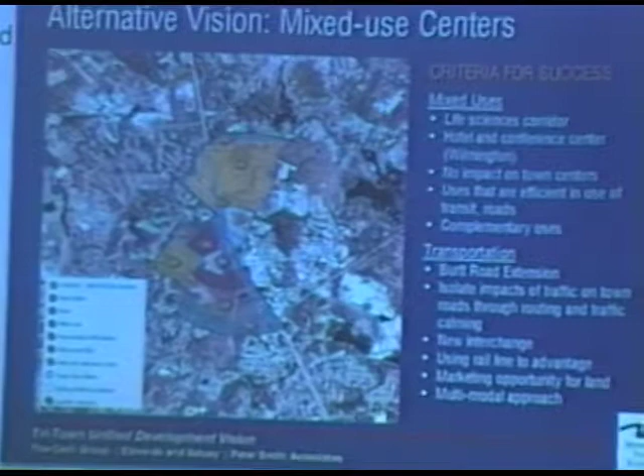What I'd like to do now is turn it over to Jeffrey Morrison-Logan, our project manager, to continue the presentation on the process, where we've been, and how we arrived at the vision plan. Thank you. Great. Thanks, Ken.

Can you still hear me okay if I'm up here? I'm a little taller than Ken, so my proximity to the mic's a little different.

Echoing Ken, there's been a lot of work done to date, going back to 2007, and arguably beyond that when the first interchange was contemplated. This has been the basis for the workshops and charrettes we've done in the fall and back in January, leading to the form-based code you're going to see tonight. We've come a long way, and you'll see details that build on this prior work.

This is the mixed-use centers plan done in 2007 that for the first time identified the different nodes and land uses contemplated in that same study area.

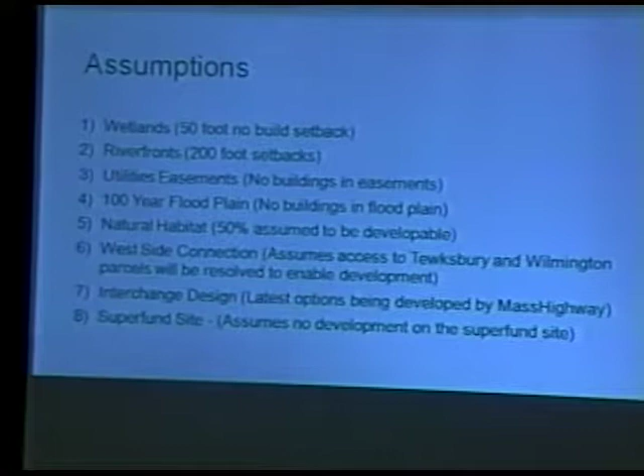Ken mentioned there's a lot of assumption involved, and it's important to understand that as you look at the graphics, there are moving assumptions reflected in our work. Highlights include wetlands, setbacks from wetlands and riverfronts, easements, floodplains, and natural habitat, all affecting where development can and cannot go. We had to make assumptions about how and what percentage of development can happen, which was very informative to developing the form-based code.

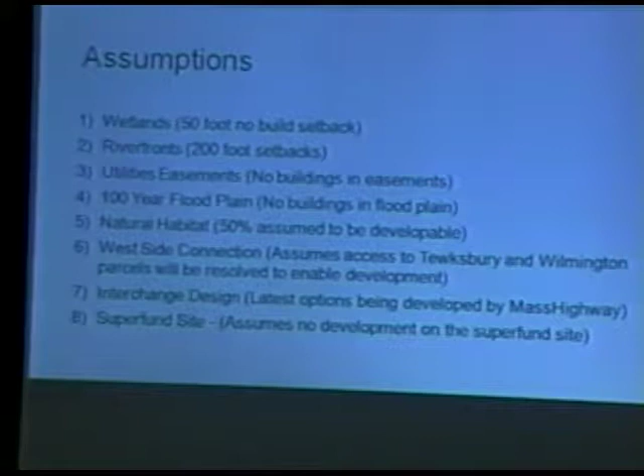The interchange itself, where the highway interchange is, and the options Mass Highway and their consultants are pursuing are important factors in where we can connect development into the system. The West Side access idea has seen a lot of discussion over the months and continues to evolve, so we made assumptions about it getting resolved as plans move forward over the next few months. Lastly, there's the Superfund site.

You'll see in some of our plans that development is shown there, but we wanted to go back and remind people that the intent is not to have development on the Superfund site. We wanted to clarify that up front.

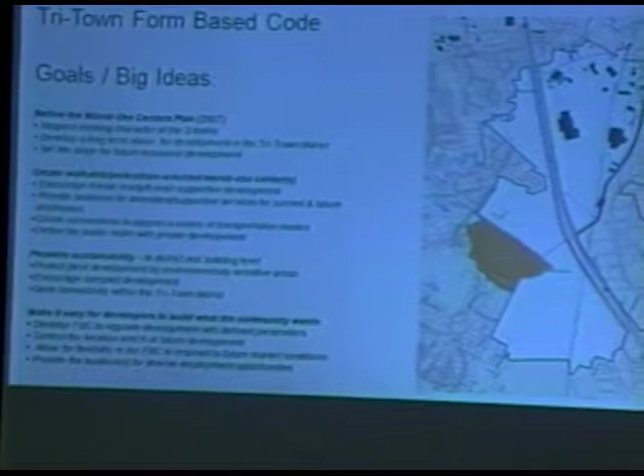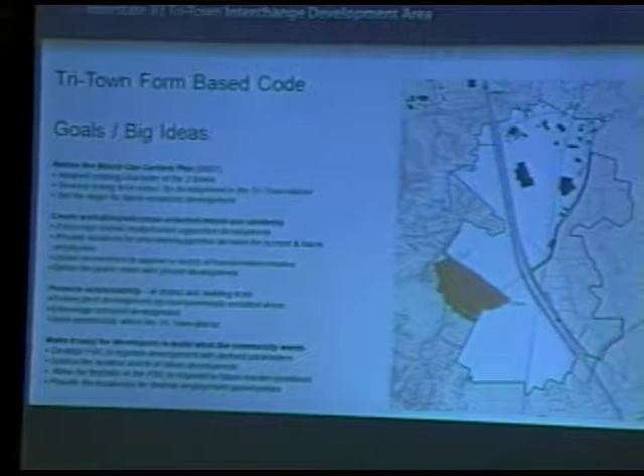We spent a lot of time at the first and second charrette talking about goals and objectives, which we've documented. You'll see many of them on the left-hand side of this slide. Jeff will talk about those as we go through the different areas within the 700 to 800 developable acres. These are important goals that have lived on in the form-based code draft in front of you tonight.

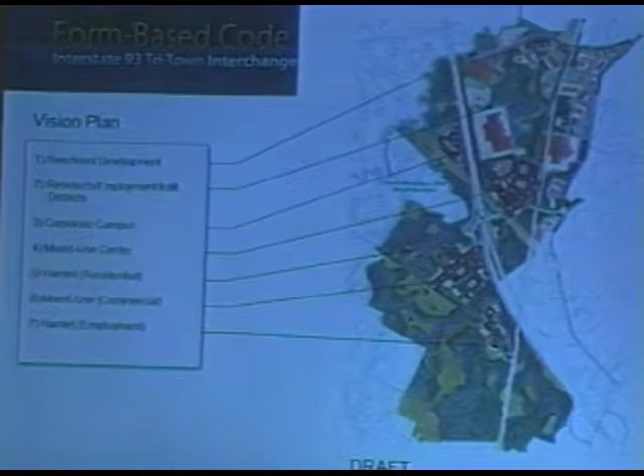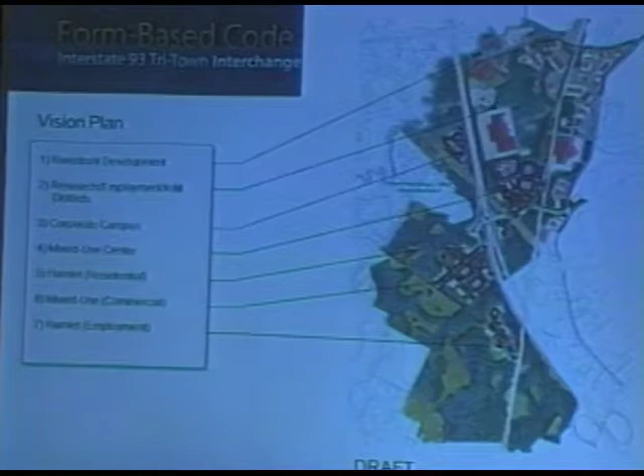The charrette in January focused on taking those goals and developing the vision plan for those same 700 acres of land. Where the red development shows up on the plan, we identified character districts, zones for areas where development shares similarities or differences. Those became important for developing the code, so that from a regulatory, zoning, or form-based code perspective, we could think about those land areas in terms of different character districts.

Jeff will talk about the differences between those. That's really the framework for what we've done to date that's led to the draft you see before you today. These are important steps from the last 10 months of our process, going back a couple of years.

We met with the task force last Thursday, and they felt it was important to share updates from that meeting. One, there was interest from the task force, mostly from the Tewksbury side, about looking more carefully at the character districts in the draft code, potentially changing one from mixed-use commercial to an employment park. That conversation happened last Thursday.

The character district currently shown on the landfill site, the Superfund site, was always intended to be removed. So we're going to remove that in the next draft as well.

The comment period we're about to embark upon tonight—in our initial project schedule we had a shorter time frame, but we're going to expand that to give the public more time to look at this draft. We're now targeting a 6-week comment period, and we'll explain that later tonight. Overall, the project schedule will get lengthened.

This is a very monumental event, and with that comes the need for time to digest these things and move forward. The task force really embraced extending this process—not to prolong it, but to give it time to sink in and get the feedback we're looking for.

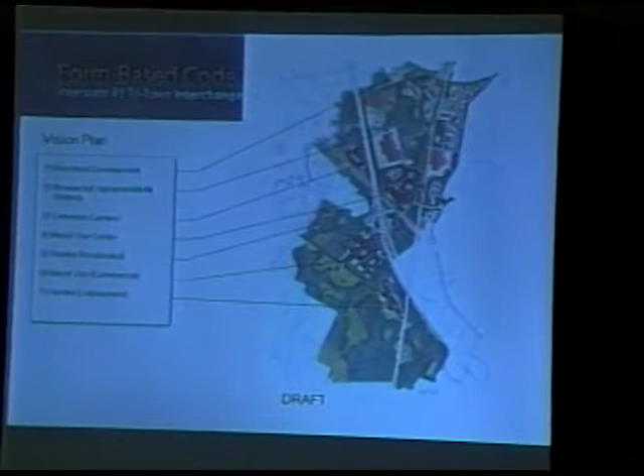These are quite simply similar to zoning maps, but these are plans that have regulations attached to them. There are two different kinds. The first is a framework plan—the overall plan, based on the vision plan. Like any good form-based regulations, they have to be based on a vision. So here's your vision plan, here's the framework plan.

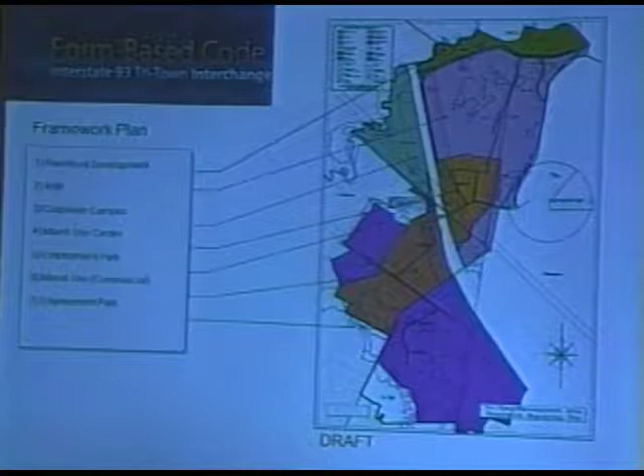See the two—the framework plan is really what it says. It sets the overall framework. It sets the boundaries for these different character districts, within which there are special rules that will push towards their character.

The second kind of regulating plan is a specific regulating plan. This is a plan made for realizing or building one of those character districts. Within each character district, before you can build, you need a regulating plan or plans.

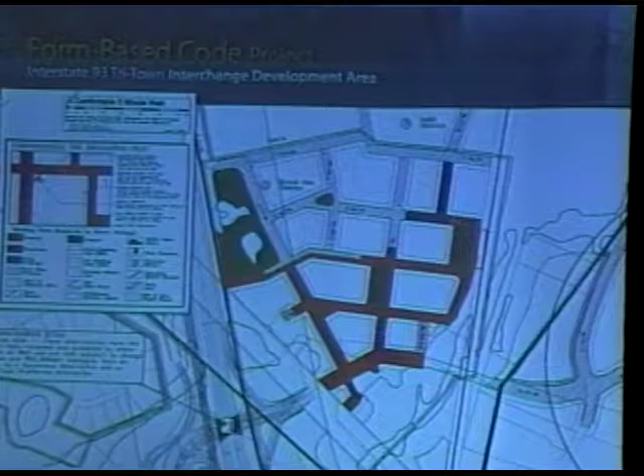And I think you can still hear me whether I'm on or not. This is an example of two regulating plans we've put in the code as examples, on both sides of the freeway, focusing in on the west side. The regulating plan is a very precise document. This is an example—so if someone were coming up with a new regulating plan on a different property, they could follow the example shown here in your documents.

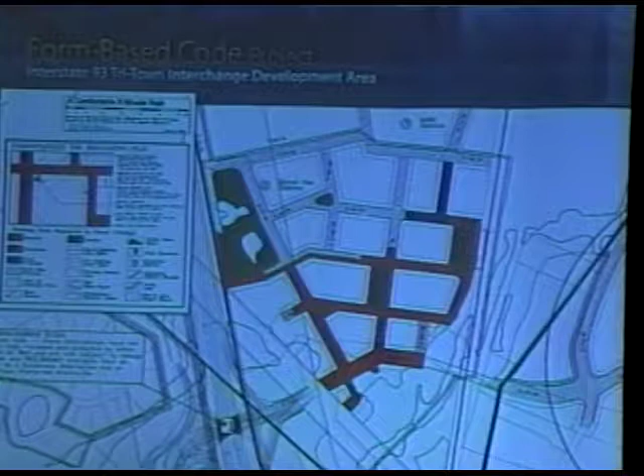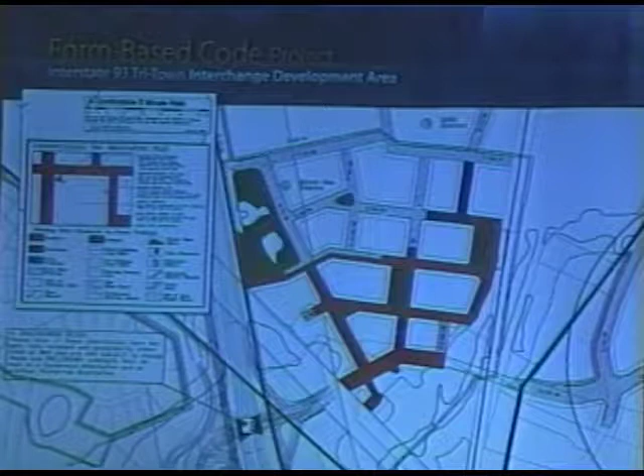Regulating plan has a key. It has extra information. You'll notice there's a specific note there about the interchange and what's shown here. A regulating plan is a place where you can have very specific, very precisely site-specific information and rules applied. It's also a place where the code references other things. You see the colors that are in the public space in the streets. Those reference the rules for the buildings that may be built on the private property in the third dimension, form

and function. Also, another minor point, you see there are two lines. There's an outer red line at the edge of the block. That's required building line. That means basically start your building here, put the front of your building here. The blue and white line that's set back inside that is a parking setback. So however parking is done, it can be done within that block. That's up to the private sector to figure out exactly how to do it. But the public's rules say don't give us a parking lot out on the edge of the street. It has to be pushed back and hidden.

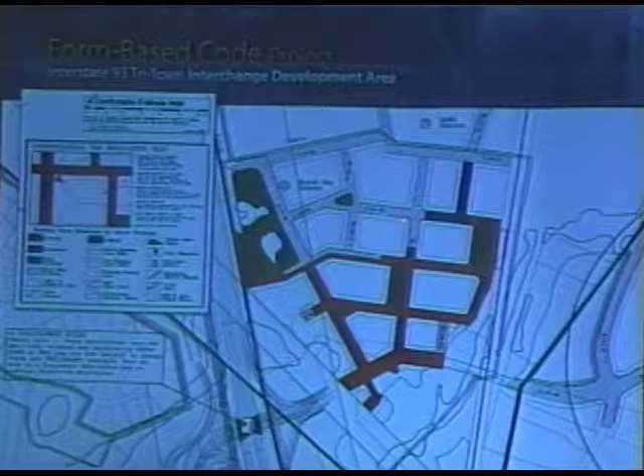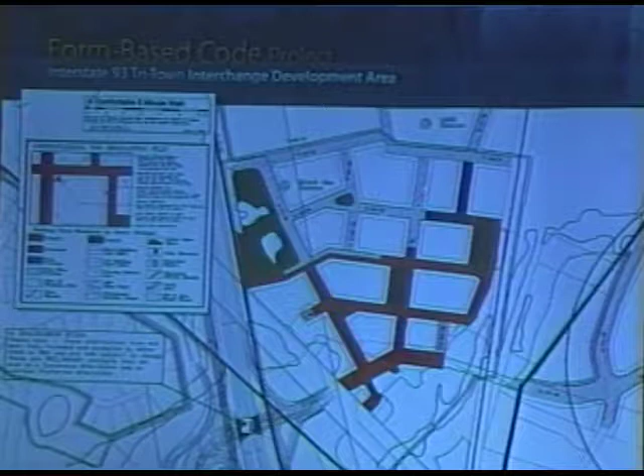Here's that parking setback line, if I can get my hand not to wiggle, and here's the required building line. So these colors and stripes define the public space that you were to see if you were to drive down the street, walk, or bicycle. And the rules are based on making that public space. Those colors lead you to the building form standards. As I said, these are the rules for the form of the building. It's form and function, but form first. Functions or uses second. There are a few different flavors of these.

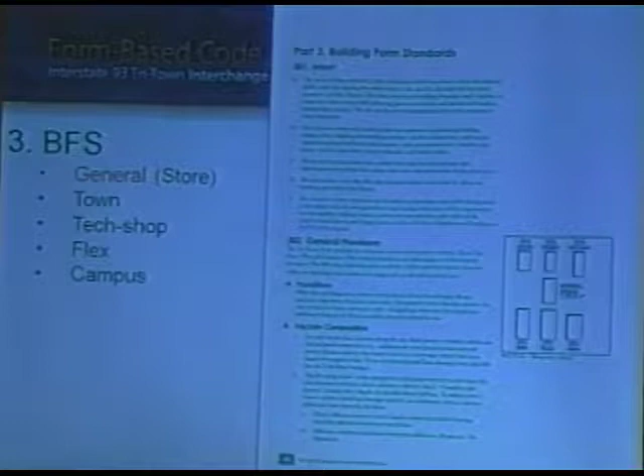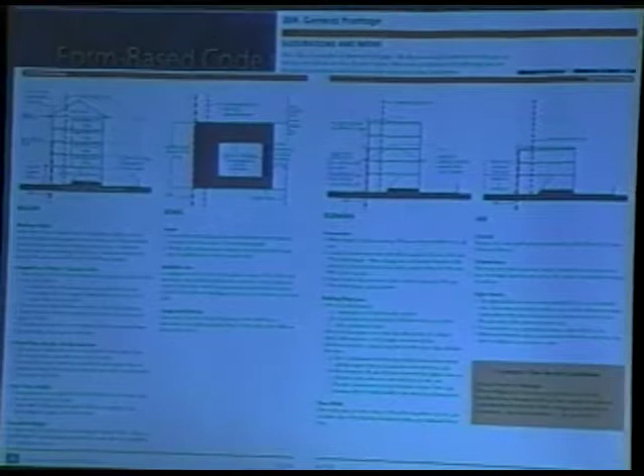The first is the general, which is we think of it as the most common type, intended to produce buildings like this, just normal town or city buildings. The rules are arranged. It's a pairing of graphics and what should be simple, clear language. There's some things that a diagram can tell you more precisely and obviously more quickly than words can. There are also some other things that words do better than diagrams. So it's a pairing of those two. You'll see this, we'll talk about this a little bit more later.

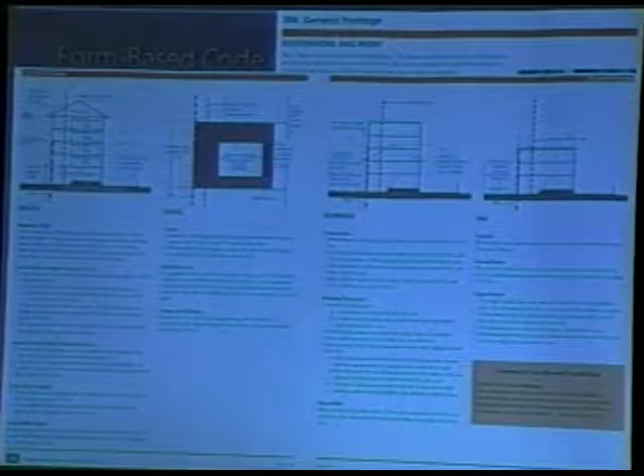There's a variety, a flavor of general we call storefront, and it is, I would say, as simple as it sounds. It's the same building, but on the ground floor it has a storefront. Think about, and certainly have seen a bit of it here in Wilmington and Andover, Tewksbury, the Great American Main Street. It's quite a normal thing. Buildings with shops on the ground floor.

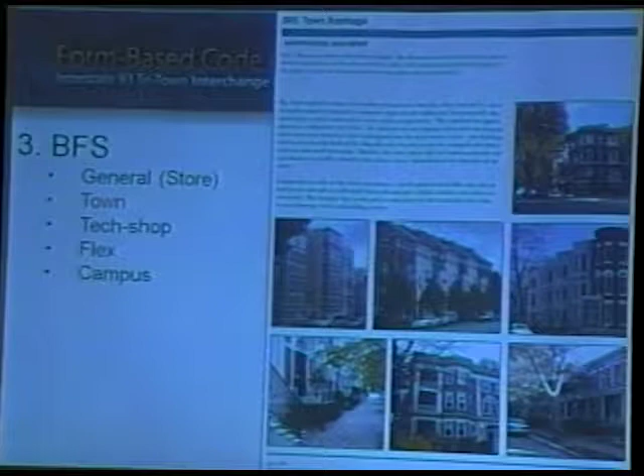The next type, town buildings. Fundamentally, what we're talking about here are those buildings very similar to the general, but everything's coming down a little bit in scale. Smaller buildings, less height. It's a reduced form of that. Think small apartment buildings, townhouses. Again, the set of rules, where before general was showing, on that example, minimum 3 stories, maximum 5. The town is showing minimum 2, maximum 3. So also lot widths tend to come down, etc.

The tech shop, a play on the workshop, but with a technical 21st century bent perhaps. Some examples of the kind of architecture it could produce. This is a type that's really about jobs, very flexible on its uses. Can be 1 story. It has to be a 20-foot high story, so it has some presence on the street that also fits with what tends to happen in workshop or technical shop applications.

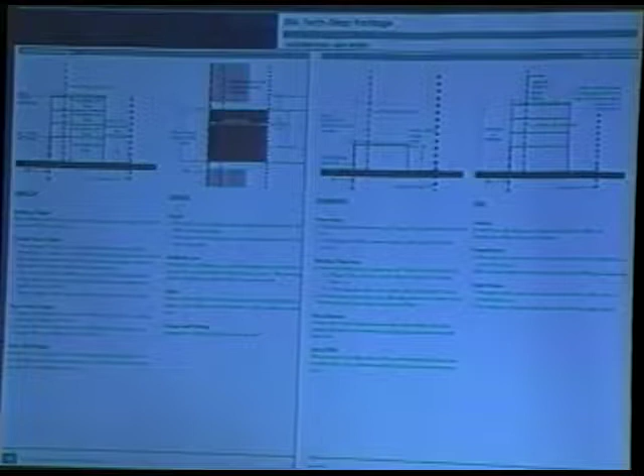But an interesting thing here, we're also allowing this to go up to 4 stories. And you've got examples here on the site already of technical buildings that are more than just the 1-story shed. They're starting to go up vertically. This is a 1 to 4 story, but I think you've all been made aware of within 500 feet of the freeway, there's a bonus of an additional 2 stories. So in some cases, these buildings benefit from that.

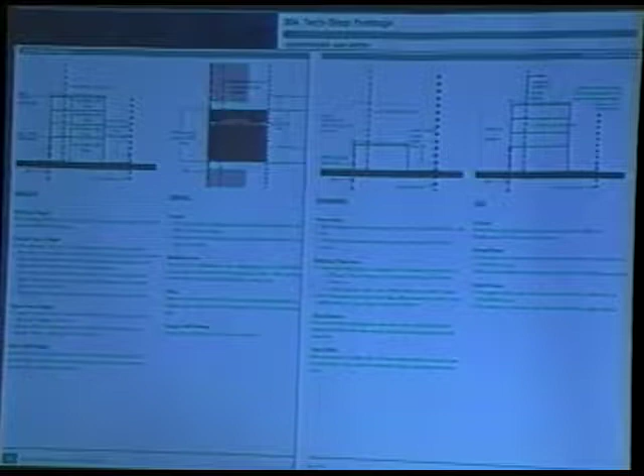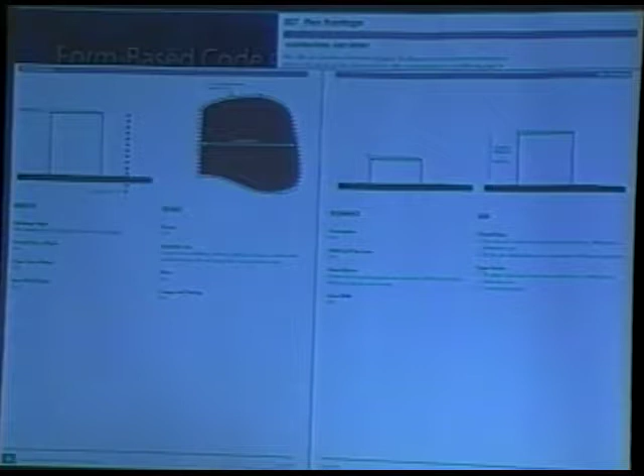The flex building type, it's almost a stretch to call it a building form standard. It's the loosest. These are used in the employment districts. The rules for this are absolutely simple. The employment district sites tend to be out away, not up against the neighbors, behind trees, at a distance. So the public sector rules on them are kept to a minimum. There's a height cap and a perimeter cap. We also require them to plant more trees on the perimeter.

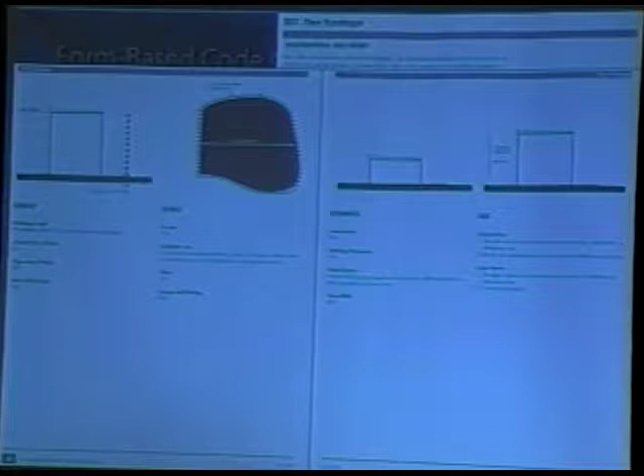But basically, this building type allows whoever's developing that a huge amount of freedom to do within that large envelope what they need to do for their business. And these are things that are out and not in areas where, on the site plan, they will be seen unless you go out to them or are in a helicopter taking a flight. And finally, the campus type.

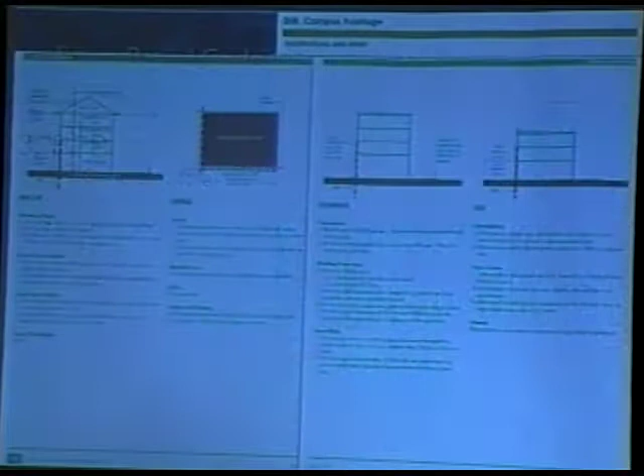The hope is to get some architecture that might look like this, but there's still a lot of variety. This is really a variation in intent on the tech shop. It's about jobs. It's really allowing employment, technology, commerce. And in that character district, and I'm sorry, I can't help but get ahead of myself a little bit, where campus is employed, there's some special rules that will push buildings towards being grouped around courtyards, green courtyards, quads, like a campus we think of.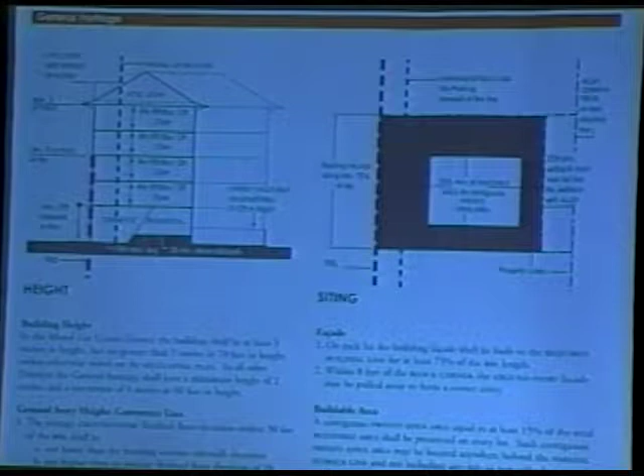Second, siting. I think the major thing that you shall do on siting is that required building line. And again, that simply means start your building here. There's great latitude in how deep the building is and what goes on behind that. But a lot of the conventional things like minimum lot, open area, et cetera, are in here in a different form.

Two others: elements, at their most simple, windows and doors. And I'd add parenthetically, most of the rules of the form standards about the buildings are focused on the facade of the building. So on the back of the building there's much less control, the idea being it's out of public view. That's more a matter for that private property owner. So there's more control on the front facade that the public sees and less on the back.

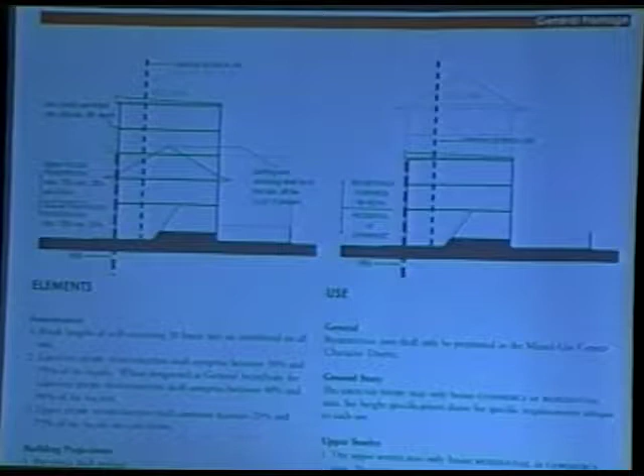And finally, use, and you see in this example, it's quite a broad number of uses allowed on the ground floor. In this case, residential or commercial. Above the ground floor, residential or commercial. One specific thing, no retail above the ground floor. There are actually some very specific circumstances where you can do that, but the rule is retail, if you're going to have it, needs to be on the ground.

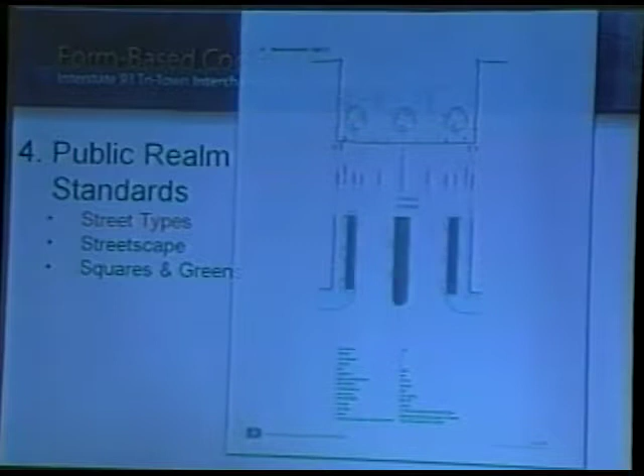The code also, Chapter 4, has public realm standards. Now, in a form-based code, the public realm is more designed and more controlled than normal, because that's what the public gets. The first element of that are the street types. Where streets are put in, there's some very specific prescriptions for how those are. Wide sidewalks in most cases, street trees planted in such a way that they actually have a chance to grow. Building frontage is controlled, and much like the graphic you see up here on the upper right, that public space between the building facades is really well considered. The private sector is the blank area outside of that. That's sort of their side of the partnership.

In addition to that, there's standards for the streetscape, how often you plant the trees, things 30 foot on center, 40 foot on center, the collection of species that you're allowed to use on the public street or in the private yards. And the standards for squares and greens are really basic standards to make sure that these are public, in public view, open spaces that are usable, not overly designed, fancy, kind of hiding places behind berms, but public spaces with green or brick, trees planted, and open to public view all the way through.

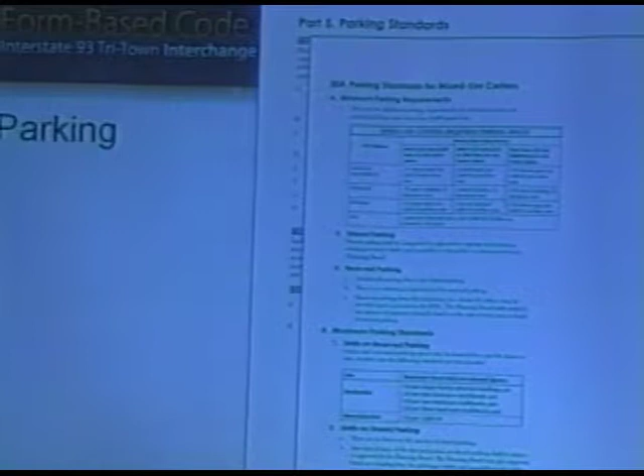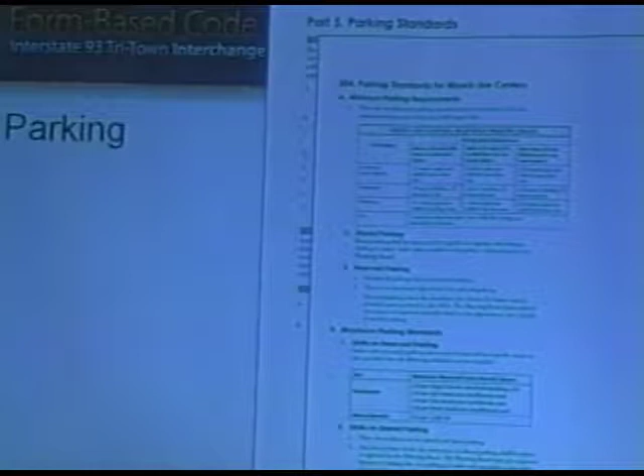Parking standards, beginning on Chapter 5, page 57. I'm not going to get so much into the numbers here, but the basic idea is this parking is done in a targeted way. We're looking at different areas where there's a wildly different circumstance. Generally, the parking standards that we've been using across the United States for about the last 50 years are very strange things. They're supposedly very scientific, and we treat them as if they're fact, but they're not. They're designed for a world which rarely exists, and generally inappropriate, and this is a correction for that.

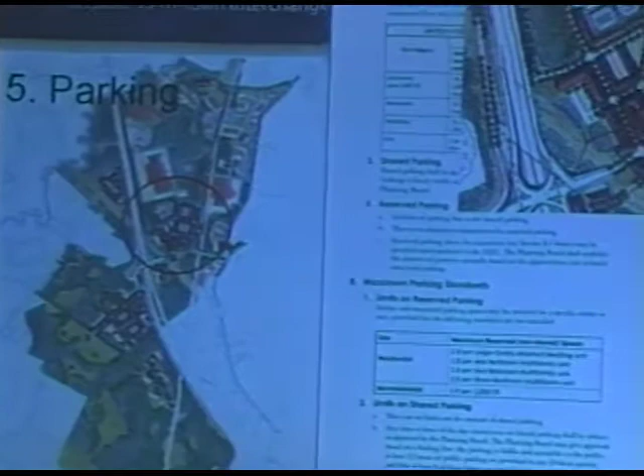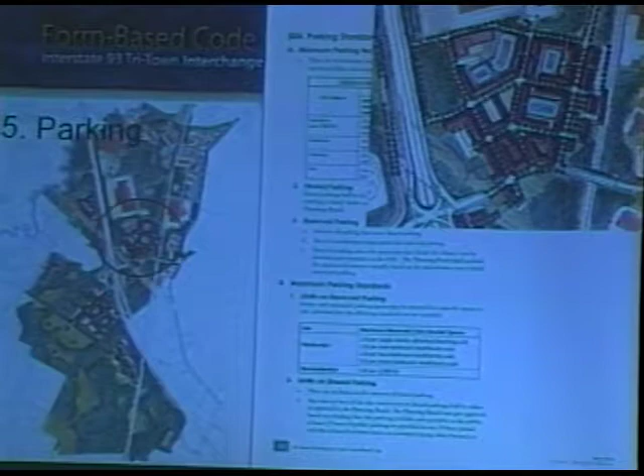As an example, looking at the vision plan, the mixed-use district on the east side of the freeway. The amount of parking you're going to need there is informed by several things. There are multiple connections to the outside world, different ways people can go. It is mixed use, so you get chances for ride sharing and efficiencies. It is to be a park once environment. So if you're there because you want to go to a restaurant or buy something, or you live there, that doesn't add up to 3 parking places. You can park once and walk a few hundred feet in any direction and be confronted with all those choices that a good downtown gives you, a good town center.

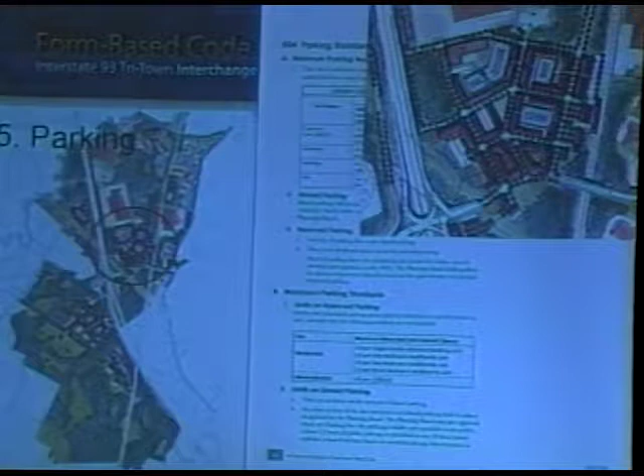So there are parking standards and reductions that are set for that kind of environment, and they're quite a bit different than the ones that are set, for example, for the employment pod down on the south. That really has one connection, one way in and out. And it is going to be, in gross terms, surely a single use. I mean, there may be multiple businesses down there, but it's going to be pretty much all one type of business. You're not going to get a great deal of shared parking based on that.

I will point out that in the code, in all of these instances, everyone is encouraged to get involved with your existing TMO. I'm going to use the wrong term there, but plug into existing things where some parking reductions are available if you have a shuttle system, ride sharing, et cetera. So we're not ignoring those things, but we're acknowledging that it's a different parking situation. If you're driving down to that employment center on the south, your car needs a parking place.

If you're talking about an activity in the mixed use area, one parking place can serve several places. So the reality and the science of the amount of parking that's needed is a reduction. That comes down so you use the land more efficiently. There's that one way in and out.

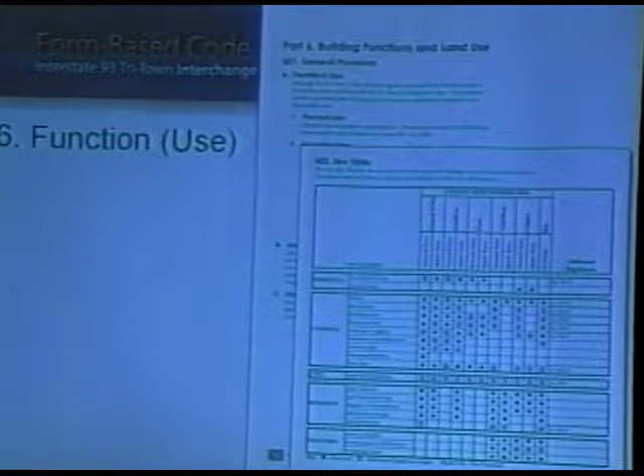I'm sorry, I go again to a retail use. If somebody has a bookstore and they want to change to a shoe store, that should be their own business and not something that requires a lot of paperwork. And the code can take it in some instances quite a bit further than that. And again, in all the building form standards, you'll see that last section, use, spells out what those broad categories are.

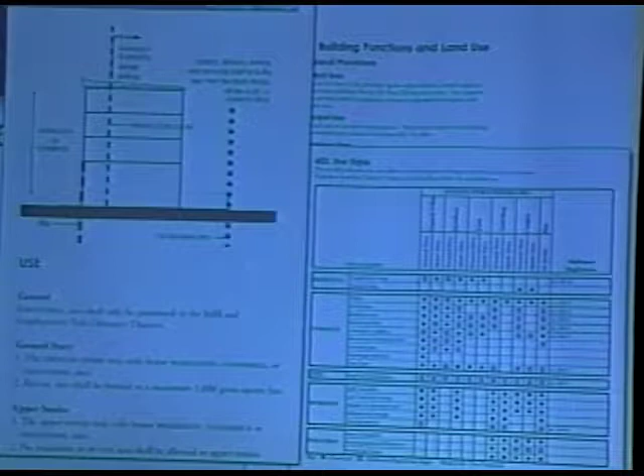The form standard itself doesn't get into some of the specificity, where in the table you see there's some uses that can be special exceptions, so there's a little bit of extra control if there's anything iffy about it. But in general, a form-based code is much more forgiving on uses, much more precise on forms. So the business sector has an easier time of it. They can do multiple things within the given form.

Definitions, simply put: the thing we're pursuing, certainly in the mixed-use center, is a different world than conventional zoning. So there are some terms that are going to be specific to making a town that aren't used in conventional zoning. There's a definition section. Whenever you see a word in the code that is in small caps, that means the code means that in a very precise way that you'll find in the definition section. We try and use that technique, by the way, as little as possible, if it seems like there's a small cap every 3 lines.

Okay. Matt. Great. So thanks very much. I'm Matt Waller. I'm with Robinson & Cole, and we are, as Carol described, legal consultants for the project. I'm just going to touch briefly on the application process and the review process that your planning boards are going to be involved in. And we really tried here to tap into the existing approval processes that you have under current zoning and not try to reinvent any wheels, but really try to stay within what you're already doing as much as we can.

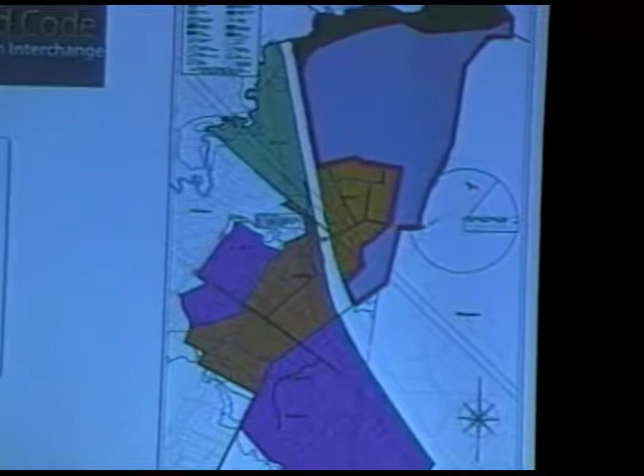I'm going to talk more about the character districts themselves in the framework plan and what they're after. Again, based on the vision plan, I can't say that too much, but it's kind of a reification of the vision. 7 districts. The riverfront up at the top, infill, campus, mixed-use center, the 2 employment centers, and the commerce, or the mixed-use commerce center.

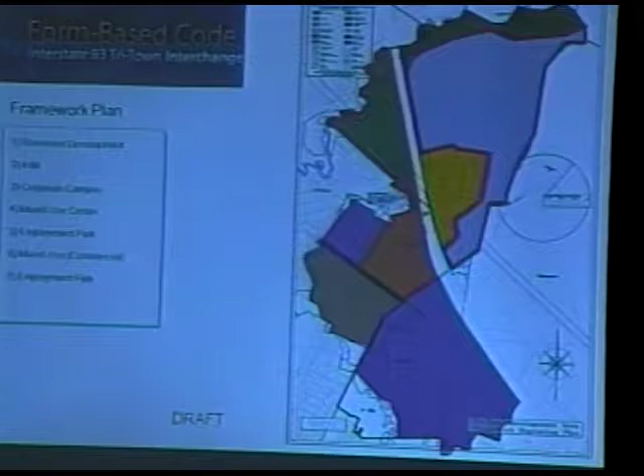Now, something that's added since the June 3rd talk is that the Superfund site is going to be taken off the table. They won't be included in character districts. They're beyond question not included. And the framework plan is a little bit like a zoning map, and it covers everything. The reality of what's developable is another thing entirely.

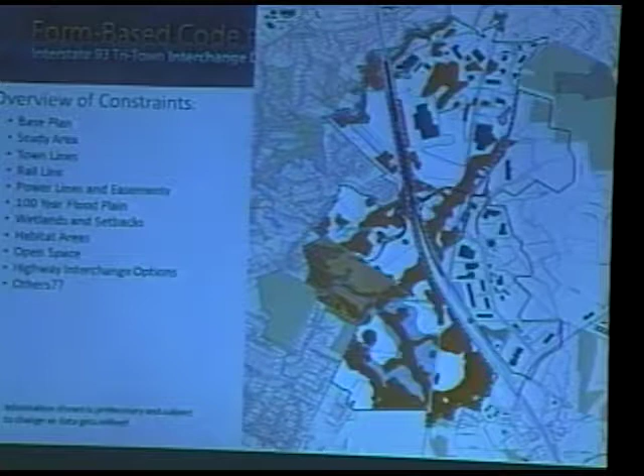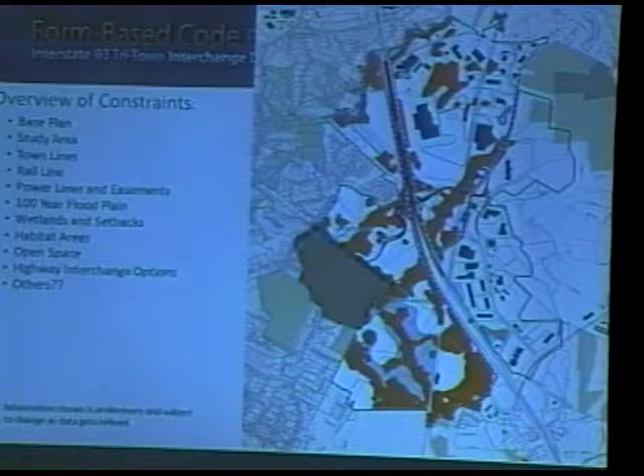On this plan, which is a preliminary look at what might be developable and what the constraints are, it is only the completely white areas that are developable. And of course, some of those are completely isolated, so there are other questions. There are some areas that look to be kind of a light pale blue. Those areas are habitat areas, which may be mitigatable, maybe not. In our conservative assumptions, we're taking those at 50%. So the numbers you heard about developable area were looking at 50% of those areas. There's a lot less land here than it initially looks like. And there's that Superfund type site, which is taken off the table.

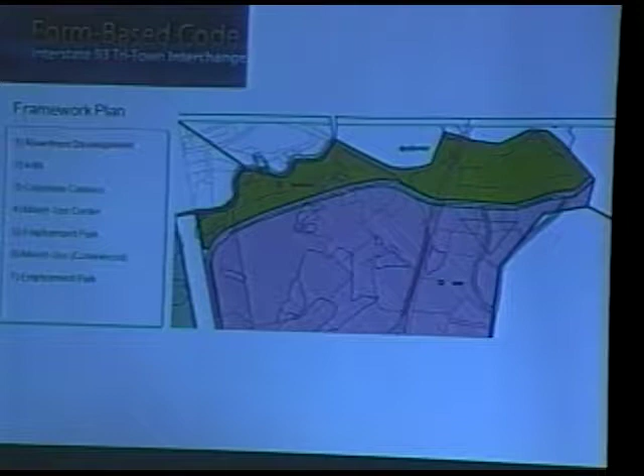Character District 1, the riverfront, and now we're really only talking about the piece on the north side of the road. Jobs and business are included, but it's quite a bit about protecting Mother Nature, protecting the river. Here's that site again up on the north, a close-up. Let's see how the laser's doing. This line is a building limit line. So buildable area is up next to the road. Area behind that is to be kept open and conserved. That becomes effectively part of the park. So that's the line between Mother Nature and the man-made stuff. This is the character that's envisioned. There will be buildings there, but also a fair part of the property is going to be open space.

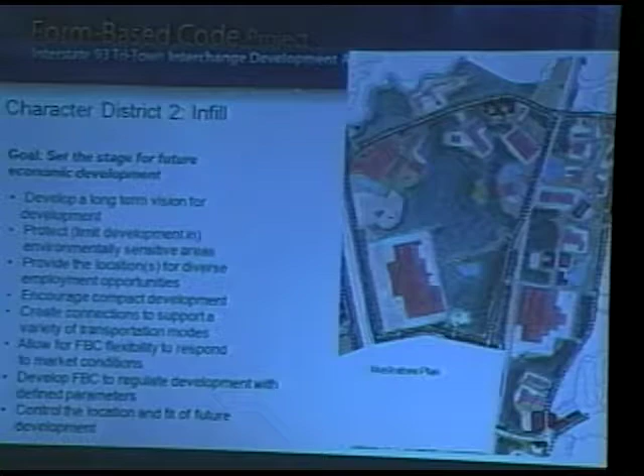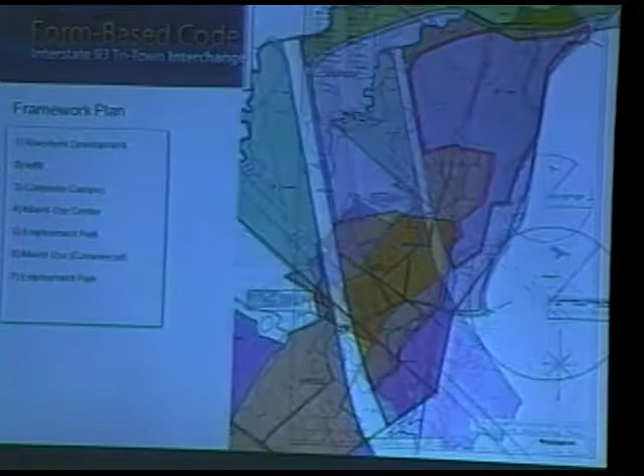District number 2, infill. This is the vision plan. You can see a lot of area is taken up by Mother Nature. Here it is, looking pretty massive in the character district, but a lot of that's hard to get to. Very much an area that's about jobs. Now, in this plan, you see the framework streets. I'd like to take care to point those out. Those are definitely there, but there's a lot of area in between.

Now, these blue lines are a layer I left on. They're DEP wetlands, supposedly open water, but there's some inaccuracy to that, we imagine. But you can certainly understand these are kind of minimums. These are showing areas that are Mother Nature. There's no 50-foot or 100-foot setback. So these areas give you a notion of where there's some real undevelopable land, but this is very much understated. Gives you a hint of what's involved.

And again, the character of this infill, very much about jobs, framework streets and new streets. We do have standards for street trees, et cetera. So the public part of this area will be presentable, will be very civil. But these are jobs, these are places about making things, very much like the character of the area right now.

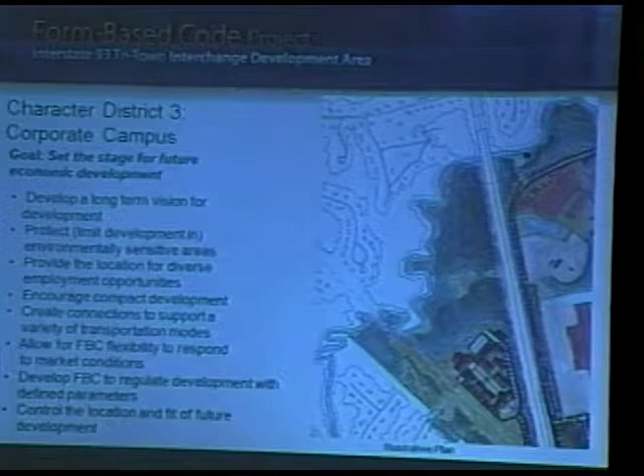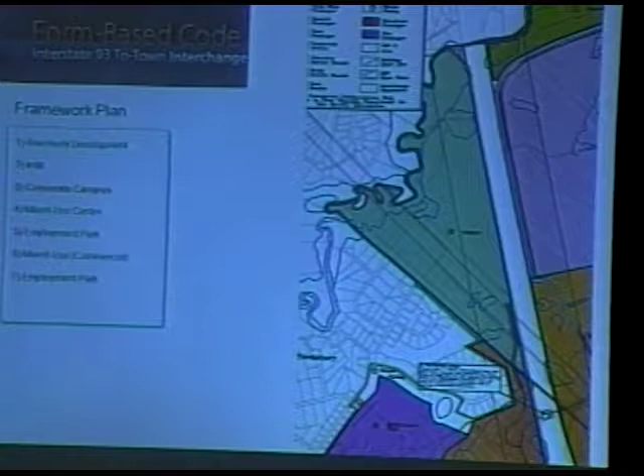Corporate campus, way over on the west side of the freeway, is an area that's similarly about jobs, but the decision has been made to try and give it the character of a campus, a collection of open spaces. There it is in the plan in the upper left. Looks quite massive, but I'd remind you of the power lines, that strip going from lower right to upper left. They take a whack out of it. And then the river, so the developable land is really concentrated to the east and to the south. Sorry about doing that too fast.

And the controls on architecture here are quite varied. If this is developed, the builders could choose a variety of styles, things like you see here, things colonial. A lot of that is left to them.

There it is, to the right of the freeway, in the mustard color—maybe that's the Lakers. The framework streets within it are more than usual.

These exact locations aren't prescribed, but all these connections have to be made. Part of what we're proposing is right here, here, and here—that's where we're splicing into either of the interchange, the freeway exit designs we were shown by AECOM. We think it's far enough back that it can be resolved there, and there's plenty of room for whichever design they choose.

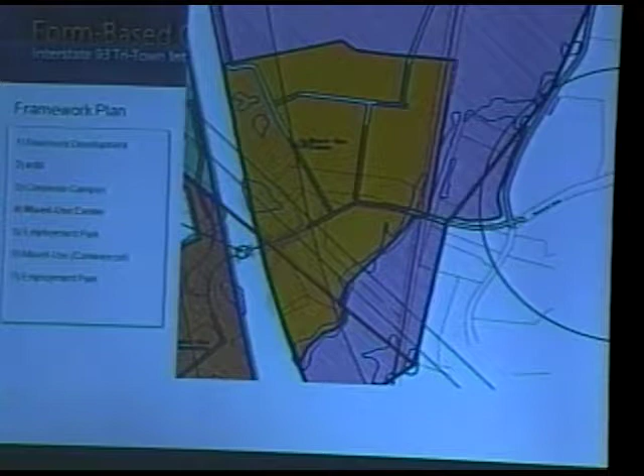At those spots where you see that simple line, we're completely plugging into their design—it's all their design, not part of this one. Also this piece where it crosses the wetlands, from there to there, is exactly to their plan. So we're really splicing into their technical directions.

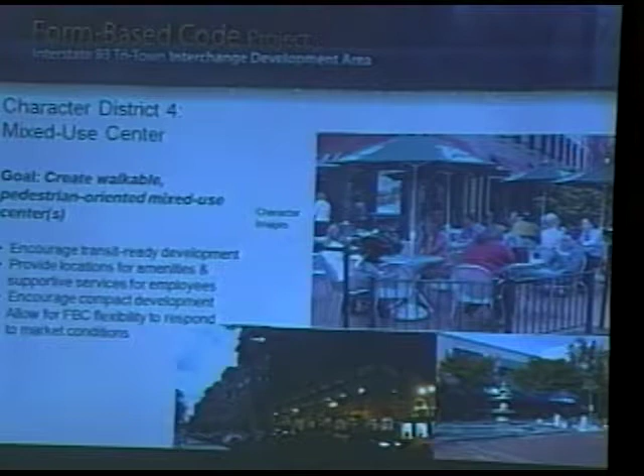And the character image for the mixed-use center: people, streets, businesses, places to eat lunch.

The character districts—I'm talking about both 5 and 7. Initially 5 was of a different character, but it's now an employment district, employment parks. When we were working on the vision plan and looking at the constraints, it looked to us like there were really three developable areas. That may prove wrong, but it looks pretty certain to us.

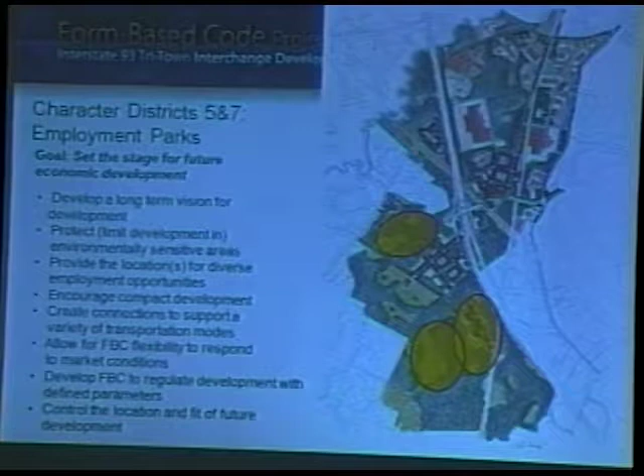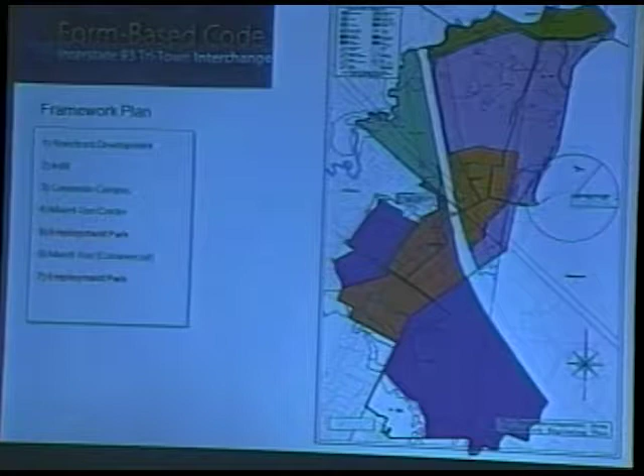These are very much about jobs. The building form standard here is flex. You'll see how these are all relatively set away—there tends to be a wetland, wooded area, or a setback between all of these areas and the neighbors. Down here you get some idea of the really extensive wetlands, which make any sort of building very interesting. But there are sites there, with consideration, and note the framework streets here.

Specifically on the Northern District—this one is a little different from the others because it really comes right up against single family homes in the town of Tewksbury, and we're sensitive to that. So we've pulled back—it's a little fuzzy in the slides, but at the very top, that white strip—we've pulled back the boundaries of the rezoning.

So there's an area there that would retain its zoning. Where that really big yellow line is, that's an area available for single-family houses, just like what you have across the street, so that pattern could continue. In addition, because the employment park is such a big change in scale from single-family to employment park, they're almost on opposite ends of the spectrum.

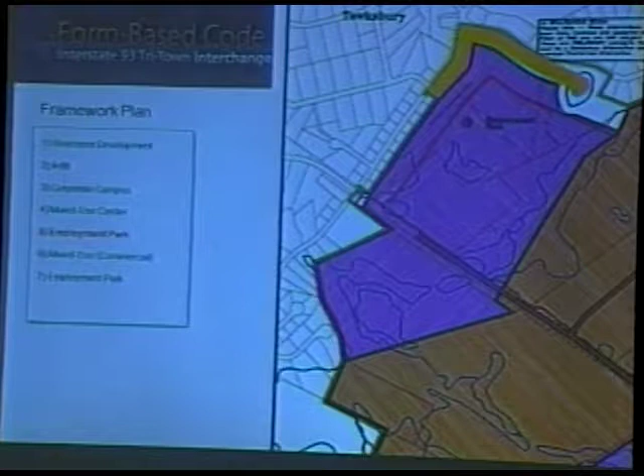We've added this red line, which is a 200-foot setback. It also tends to coincide with some environmental constraints, but it provides a surety, we think, to the nearby residents in Tewksbury that this is going to be quiet and almost invisible—or perhaps not visible at all—in its juxtaposition.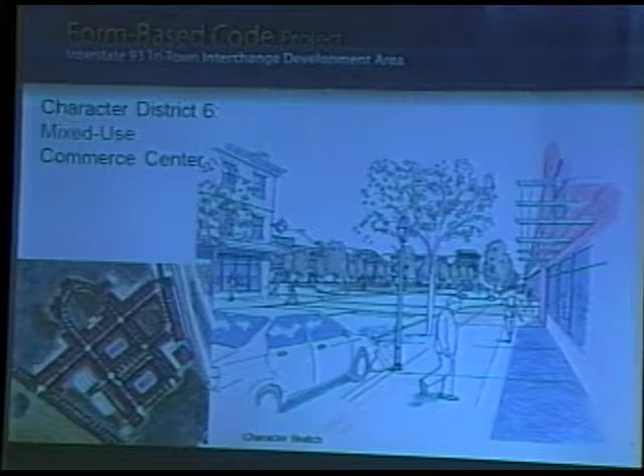The Mixed-Use Commerce Center is very much like the Mixed-Use Center on the eastern side of the freeway, but on the western side there's a very clear directive: there will not be residential in this center. So in some ways it can physically look quite the same, but when you're there, certainly after business hours, it will feel a little different.

There it sits across the darker brown area—and again, remember how much of that is taken off by the Superfund site. But this is an area for business.

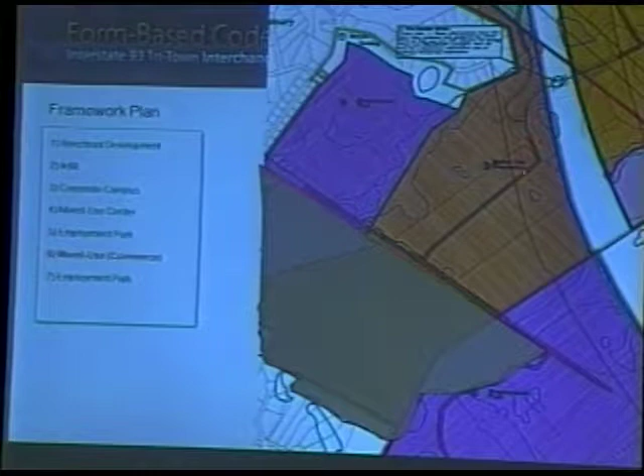Here's where we're splicing onto either of the options for the freeway interchange, with a very simple, basic connector road in the framework plan. Again, the character of this in some ways is very likely to be much the same as on the other side of the freeway, but people won't live there—it's a workplace with very broad parameters on what those commercial uses may be.

And the ending slide of our character district tour is this juxtaposition between the real Main Street and the real countryside—town and country—both of which you're going to see a lot of in this study area.

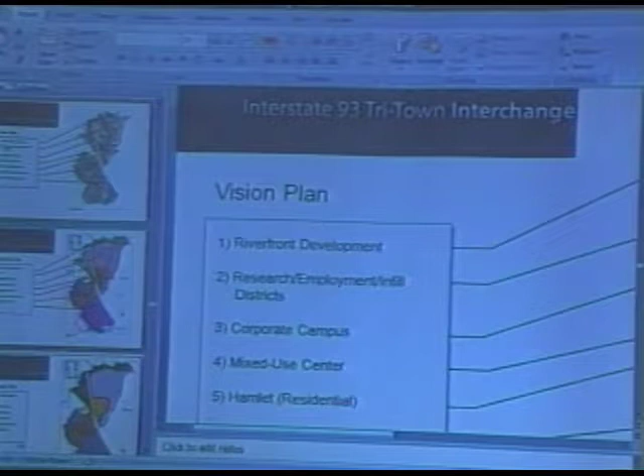That one is. Oh, God. Sorry. Thank you, Bill Gates.

So I'll start with the vision plan here. If we're looking up on the screen, we have I-93 through here. We have most of Andover up and to the right. Wilmington comes around to the bottom over here. Tewksbury's over on this side. This is the approximate location of where the proposed highway interchange is. And the plan here has the character districts. This is one character district up in here, which is called the Research Employment Infill. Actually, let me go to the next slide, which shows the different character districts.

So again, you have to show Ballardvale Street as well. Sure, because that's a—thank you. Bear with me a second. Ballardvale Street runs down through here. And there's an existing highway interchange down at the bottom here as well. The Shawsheen River runs, another landmark, up towards the north part here as well. We have South Street over here as another reference point. And we have the existing rail line that runs up through the middle of the plan here as well. Some key land features.

The Pfizer properties, another couple of key land features up here to the north, and Procter & Gamble down in here as well.

If I go to the character districts plan, you can see those same features, the Shawsheen up in here, and the couple of character districts, the Campus Character District and the Riverfront Development District up in here. This will animate to show those again. I'll wait for it to finish and come back, as it goes from north down to south highlighting each of those districts. But again, we have the highway through here as well.

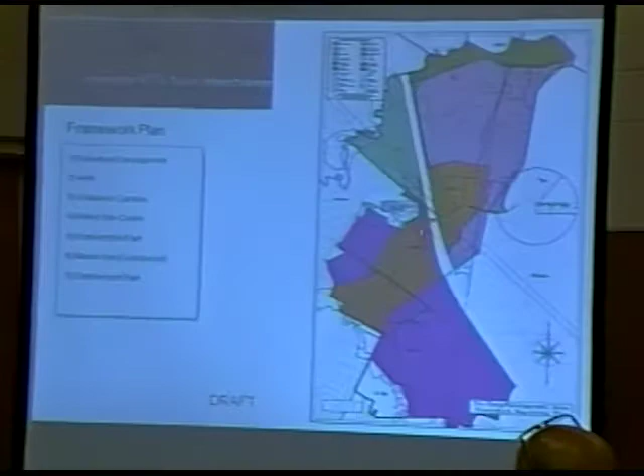That would be a logical way to do it. Character districts cross the ownership boundaries from one district to another, so some owners might be in multiple districts, for example, and multiple town areas. For example, the East Side Mixed-Use Center, I believe there's some slivers of Tewksbury land in there, as well as Andover land. They bridge across both of those as well. So there are some circumstances where that happens.

One of the goals of this whole process has been to provide consistent zoning across the 3 towns, so that a developer, or an owner with a parcel of land, knows what the expectations are, whether they're developing in Andover, Tewksbury, or Wilmington.

I have more, but I don't want to hog the mic. Okay, why don't we open it to the public as well, and we can come back to the boards too. I would ask you if you would please go to the microphone so that you're able to be heard.

My name is Jerry Dijon. I live in Wilmington at 32 Salem Street. To put it into a little bit better perspective, can you point on the map approximately where we're located here at the town hall, and possibly the line of Tewksbury and Wilmington on Salem Street near Route 93?

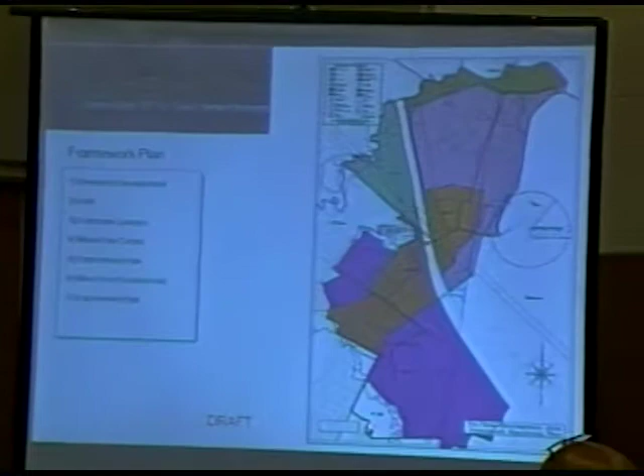Salem Street's really off the map here, it isn't on the map, and the town hall is nowhere there. I think the town... so, 93, I see 93 there. McDonald Road is at the bottom of the purple here, at the very bottom, right there. Paul, thank you. Over to the right more? McDonald Road ends right there. Salem Street's down here. All right, thank you.

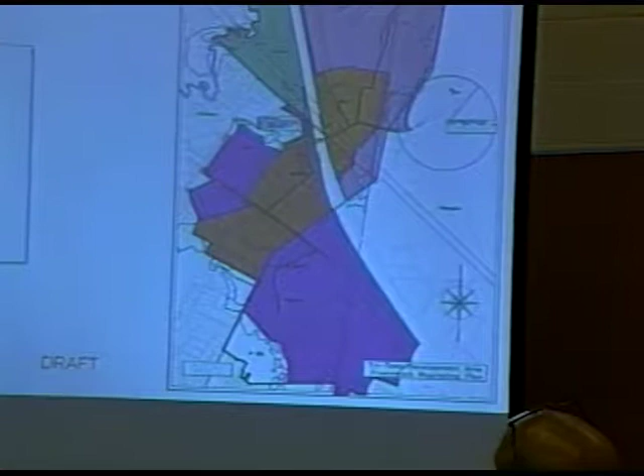And from Andover, this is Lowell Junction, this is Ballardvale, or River Street leading into Ballardvale, which would be off the map, Ballardvale Village.

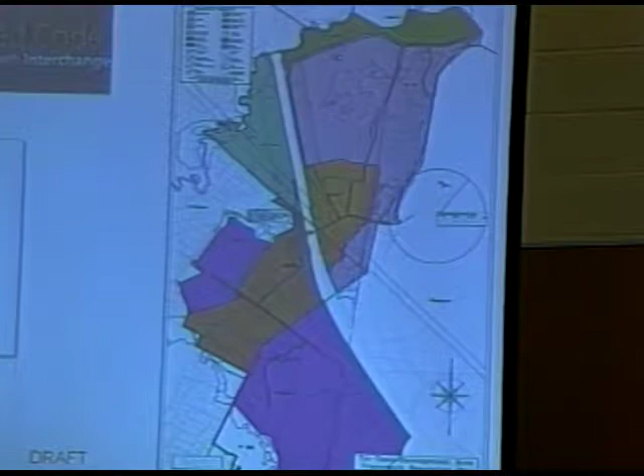I'm Michael Champoux, I'm a selectman in Wilmington. My question is, as I look at all this stuff, and I've been participating in some of these conversations, I have a tendency to think about it in terms of the way we live today — the way I drive, the way I work, the places I go. And the code, at least to my understanding, is intended to give us a framework for 10, 30, 50, 80, maybe more years hence from now. So I have, I guess, two questions related to that.

One is, what's the mechanism in the code, and maybe this is a legal question, for reevaluating or reestablishing a code to accommodate technology that we can't conceive of today — travel technology, automobile technologies, rail or hovercraft technologies, or whatever. I joke, kind of, and I'll leave it at that. So that's a blended question: what about the future, what about the technologies we haven't even conceived of? These designs are based on today. What about tomorrow, and what is the mechanism within the code to accommodate the future of these different kinds of technologies? I'm interested in that, and it's not a discussion I've heard an awful lot about in this development process of the code. So thanks for whoever's going to take this one on.

I think it's a short answer at the moment, which is that the code doesn't have a special mechanism for dealing with changes to technology 10, 20, 30 years from now. If something arose that was a huge technology that changed the way we occupy the land, you would go back, like you do with any zoning code, and make amendments that would go through the same process we're going through today. It really isn't any different than the conventional zoning we have in each of our towns right now — we'd have to do the same thing. So our Tri-Town task force would continue to live 50 years down the line, we'd have to get together again. Absolutely.

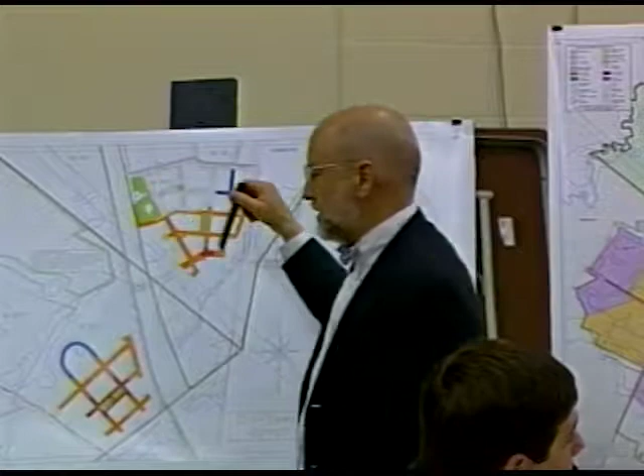Yes, Stan Franzine. Just to follow up to the gentleman's question from Wilmington, does the form-based code address anything like a regional transportation center or a new commuter railroad station along the tracks there in the Lowell Junction area? I apologize, I forgot to mention it. It is definitely planned, and actually this example, I can't stand in the right place now. This example regulating plan is based on a rail station, so it's feeding and tied to that, and that's roughly about right here.

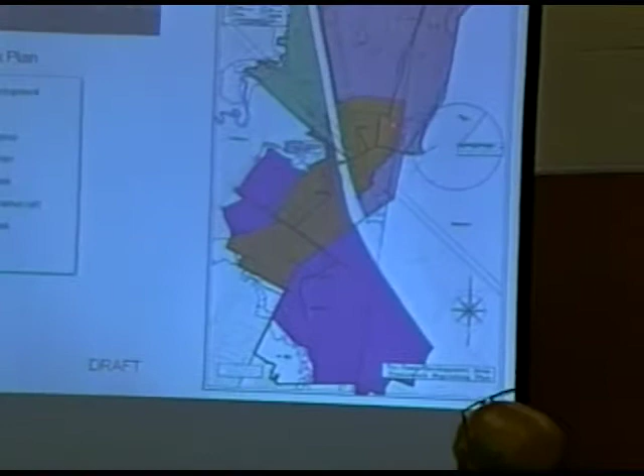Where's that in relation to the current Ballardvale stop? It's off the map. It's up the map. To the north of Ballardvale stop, to the south of Wilmington stop, both off the map. The other consideration that's given in the form-based code is a credit for parking if you are near a parking facility or a transportation node. You're allowed to reduce your parking to accommodate folks coming in a different method.

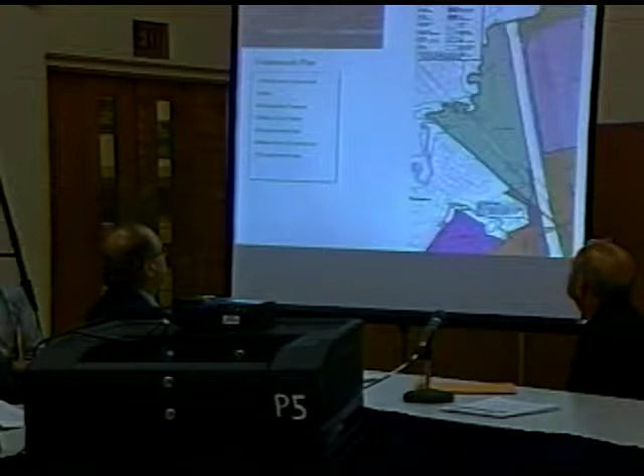I was trying to avoid having to go through these, so bear with me as I try plan B of getting to the end of the show. It's a good impression. Right. This is the fast version of tonight's show. Even better. All right. Okay, so here we go.

And I think so far as next steps, after that comment period closes, we're planning to coordinate, as we have been throughout this process, with the 3 town planners to get a better sense of what this might mean about follow-up, about when the town meeting process might happen. I know we're already thinking to spring of 2011, but we'll fine-tune that and update the website and the task force accordingly after that 6-week period. So we're very much looking forward to the comments. And I think that's it for us, Carol.